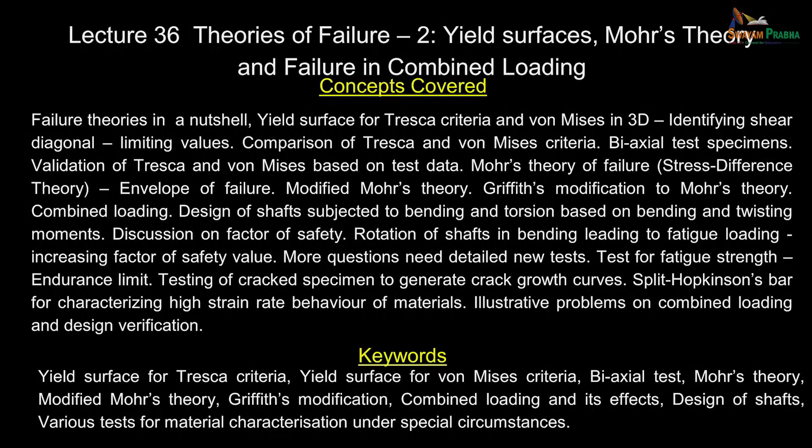Let us continue our discussion with theories of failure. You should recognize that these theories basically developed from a simple tension test. Later, people conducted experiments on geometries where they could change both sigma 1 and sigma 2, then verified it satisfies even in a biaxial situation.

As far as brittle materials are concerned, we have looked at the maximum principal stress theory. Once you go to brittle material, the ultimate tensile strength becomes important. There is nothing like yield strength - the material does not give you any warning, it simply fractures. We will not try to apply maximum principal stress theory to a ductile material.

One of the very famous theories, developed very early, was the Tresca yield criteria. The way you will have to appreciate this theory is that we are monitoring what happens to the shear stress.

It is written as sigma max minus sigma min divided by 2. When this reaches a critical value in a tension test, you go only up to sigma ys because you are pulling the specimen, and you want to see when yielding has taken place. You use that information and limit the shear stress at that stage to be the permissible one.

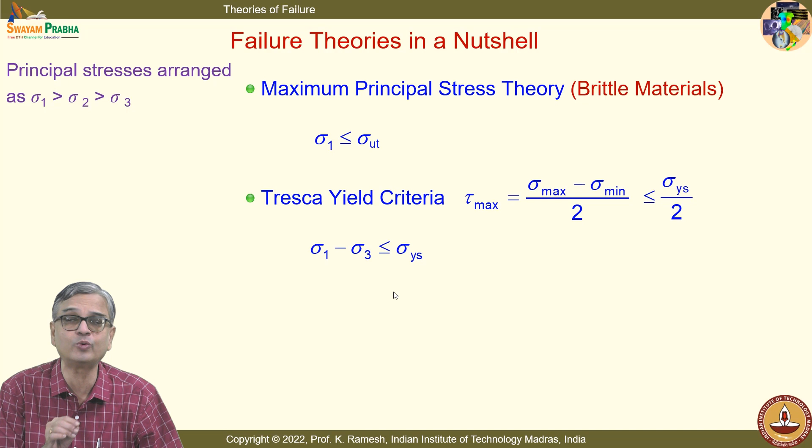So rather than sigma max minus sigma min, if you write it as sigma 1 minus sigma 3, even when both principal stresses are positive and both principal stresses are negative, when sigma 3 is 0, you will never make a mistake in the calculation.

We have also seen the von Mises yield criteria, which reduces to sigma 1 minus sigma 2 whole square plus sigma 2 minus sigma 3 whole square plus sigma 3 minus sigma 1 whole square, less than or equal to 2 sigma ys square.

I have also said that von Mises yield criteria comes basically from distortional energy theory. Later, the octahedral shear stress was monitored by Nadai, and whatever results you get from octahedral shear reaching a maximum and distortional energy reaching a maximum, the functional form of the equation for calculation reduces to this basic equation. This is a verification that the yield criteria has more justification, because you have approached the problem from two different directions, and both give identical results.

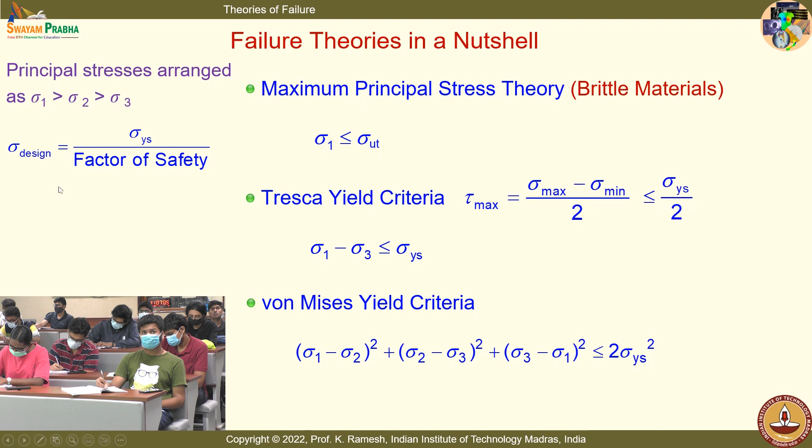Finally, when you do the design, nobody even goes anywhere near this yield strength. You have what is known as factor of safety, so you have a design strength, and all of these equations will change.

Sigma 1 should be less than equal to design strength, sigma 1 minus sigma 3 should be less than equal to design strength, and sigma 1 minus sigma 2 whole square final expression is less than 2 times design strength square. One of the most challenging aspects in design is how to estimate this factor of safety.

There are multiple considerations that go into it. We will discuss some of these aspects in class today. Other aspects, when you do the machine elements course, design of machine elements course, you will have more comprehensive development on how to decide factor of safety.

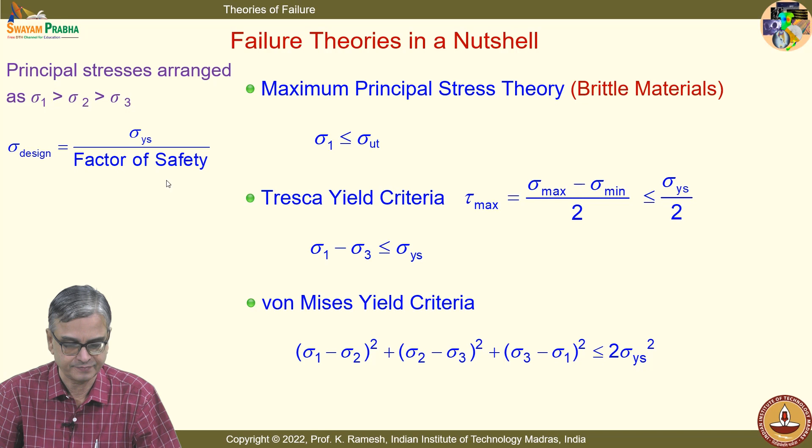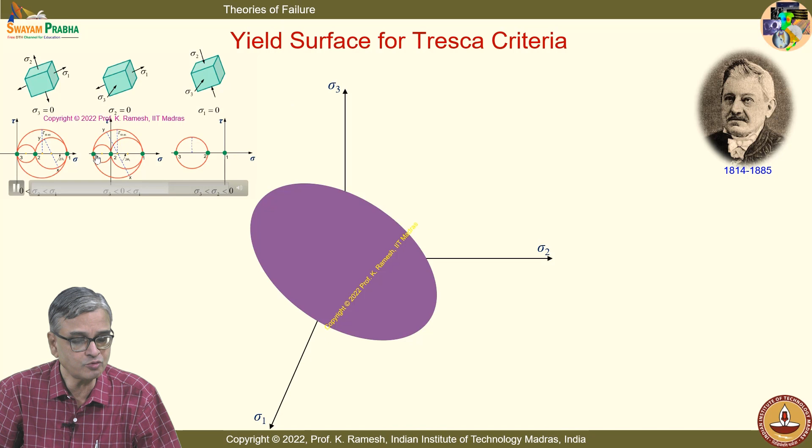You should recognize that this was one of the earliest criteria developed, in 1864. I have also been cautioning - when I have this, can I call this maximum shear stress? You have to look at sigma 1 minus sigma 3; only that gives the maximum shear stress. This becomes particularly important when both principal stresses are positive or negative, like what you have here.

You normally ignore zero - don't ignore zero. Zero is very important, and that is a contribution by Indian mathematicians. With all your environment now, you want to have zero emissions. So zero is very, very important.

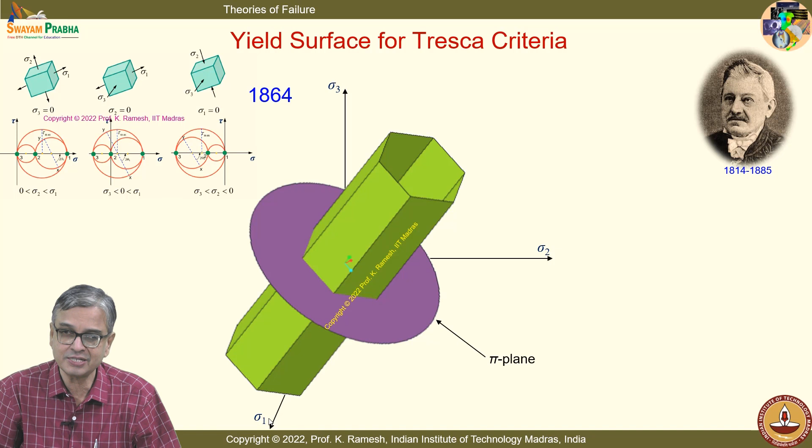One better way of understanding and implementing Tresca criteria is to use it as sigma 1 minus sigma 3. We have also seen that you can have what is known as a pi plane, which, referred in the principal stress reference sigma 1, sigma 2 and sigma 3, takes the form of a hexagon.

If you want to draw this, you can appreciate that I do a simple tension test and find out this point, because it goes to sigma ys. I can also keep the specimen horizontal and apply the load to get this point. I can also have a provision where I do a biaxial test, applying equal values of sigma 1 and sigma 2. Even in that case, because sigma 3 is 0, from the strength of materials you again get sigma ys divided by 2 as the maximum shear stress, so I can get this point.

So you can imagine how the first quadrant is obtained as a limit from our simple understanding of the tension test. The tension test also says something about the magnitude of the shear stress. When sigma y reaches yield in the tension test, from your Mohr circle you can find out what is the maximum shear stress. Once you have a pure shear stress state, you can always look at it as a combination of tension and compression. We have seen this repeatedly, using it to establish the interrelationship between Young's modulus and shear modulus, and when we wanted to paste a strain gauge on a shaft to determine torsion, since a strain gauge can measure only axial strain.

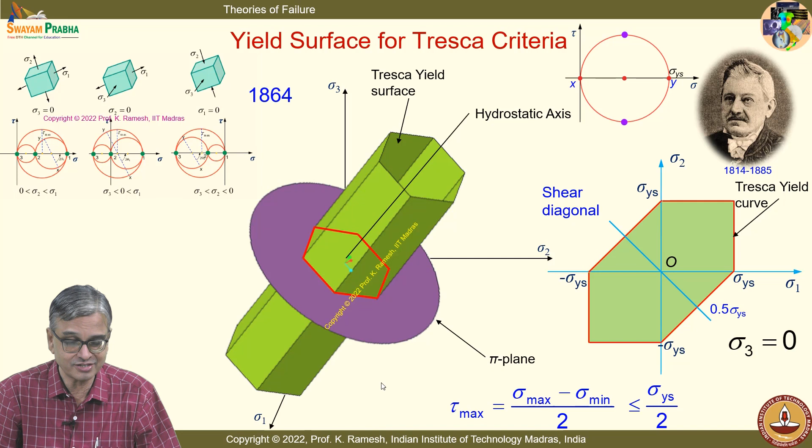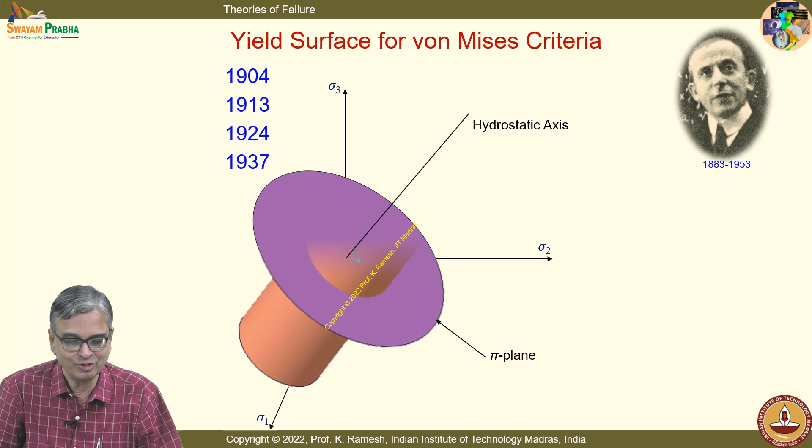The moment you get into von Mises, there are multiple contributors. It started in 1904 by Huber, 1913 by von Mises, 1924 with a better explanation from Hencky, and then in 1937 an altogether different approach by Arpad Nadai, who concentrated on what happens to the octahedral shear stress. So there are multiple contributors, and historians always go back to find even a trace of related knowledge to give credit. You'll be surprised that Maxwell also thought about a theory similar to this, and Maxwell is mostly understood in electrical sciences, because in those days all branches of physics came under one umbrella.

You find this von Mises yield surface is a cylinder, and the curve is a circle in the sigma 1, sigma 2, sigma 3 plane. But if you put it in the sigma 1, sigma 2 reference axes, it gets elongated and takes the shape of an ellipse. So if your stress state is within this ellipse, no yielding is possible. If it is on the boundary or exceeds it, then yielding is definite in a given material.

All of these have been conjectured based on a simple tension test, and you should never lose track of this. You can justify that these theories are useful only when you conduct complicated experiments, plot the experimental data, and verify whether it matches. We will also see that.

Now the next question is, I have shown von Mises independently, and I have also shown Tresca independently. You've seen the shapes: it is a hexagonal cylinder in the case of Tresca, and a circular cylinder in the case of von Mises. How do these two compare? That is also very interesting to see.

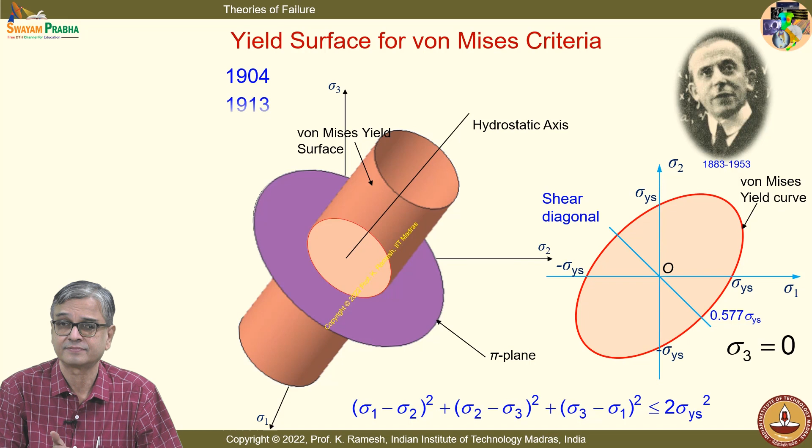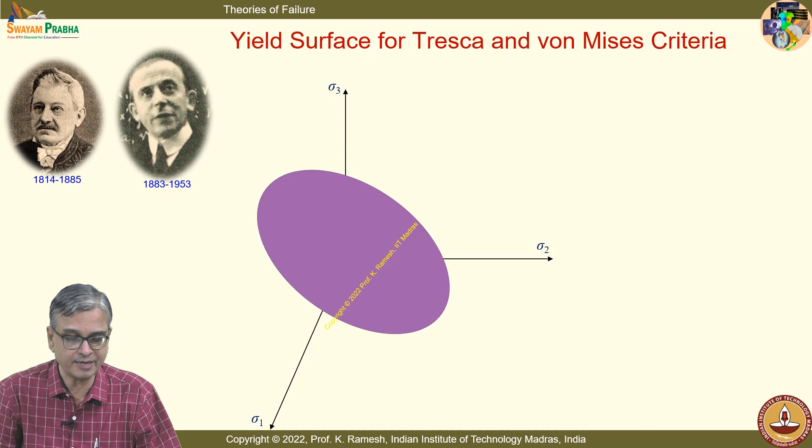Suppose I plot these two theories in one reference, you get a very interesting geometrical appearance: the von Mises cylinder just encloses the Tresca yield surface. It is slightly different. From a computational point of view, Tresca was very easy to do. Imagine if you have a slide rule, how will you compute sigma 1 minus sigma 2 squared and so on, as in von Mises? You can't easily, but with Tresca you can definitely find out the difference. So you should give credit, it was one of the earliest theories.

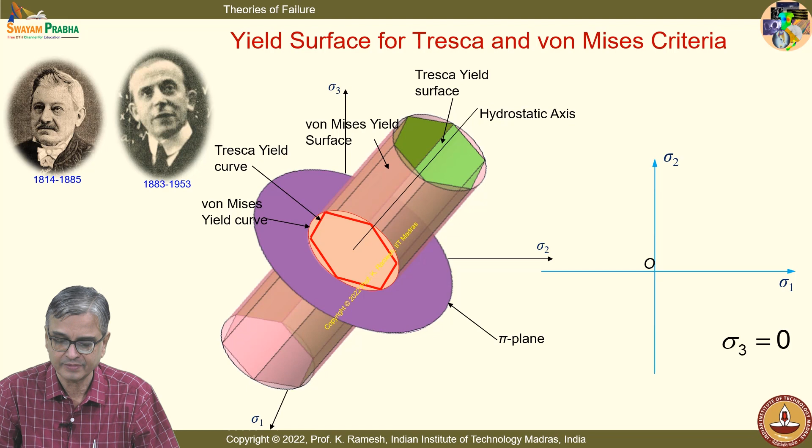So I have this as a circle enclosing the hexagon, and when you see it in the sigma 1, sigma 2 reference, when sigma 3 is 0, I have this elongated hexagon. This is enclosed by the von Mises ellipse.

So the idea is, in a real life situation when you have complicated loading acting on the system, if you are able to find the principal stresses, and their combination lies within this elongated hexagon, it is predicted by Tresca that you will not reach yield. Von Mises is slightly relaxing this, so it allows a small increase, and within that, if your point lies, you have not reached yield condition, meaning you are safe.

So this is looking at the extremum value. When you go to design, you never go near this unless you want crash protection, where you want the occupants in the car to be protected. After the accident, you want your crash bar to go out of shape while you remain in good shape, so it should absorb maximum energy. There you allow it to fail by yielding. In none of the practical applications do you ever go anywhere near this.

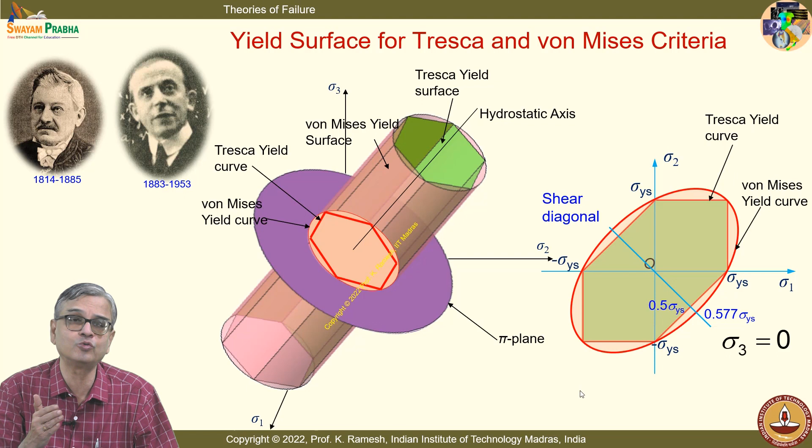Now we will also see the shear diagonal in one diagram. You will see the von Mises theory gives this value as 0.577 sigma ys, whereas Tresca gives this as 0.5 sigma ys. So even if you do Tresca analysis, you are conservative, your failure will not happen.

These days, with optimization where we work on space technology, weight reduction is very important. People want to do the analysis to the extent they just have material to do the intended task. That means your mathematical modeling should be very close to what is anticipated in the actual condition, and you want to optimize, you want a light helicopter, isn't it? Initially they make a helicopter to fly, then they try to find out where they can reduce the weight.

Same is the situation in the case of landing gears. We have seen photoelastic coating employed to reduce weight. So when learning stress analysis, it is not only the maximum stresses that are of concern, even the minimum stresses you want to keep at a reasonable level so that the weight of the structure comes down. So it depends on the requirement. Remember this: failure theory is a substitute for good test data. If I have good test data, I would rely on that.

Not only that, in the early development of jet aircrafts, I said that you had big windows, and even Queen Elizabeth traveled in that, and the DGCA of US said that these big windows are dangerous. There have been explosive failures of the Comet aircraft. It happened even when it was taking off from Calcutta. When they analyzed it, they found a crack generated from the window, and the plane burst like a bomb in midair.

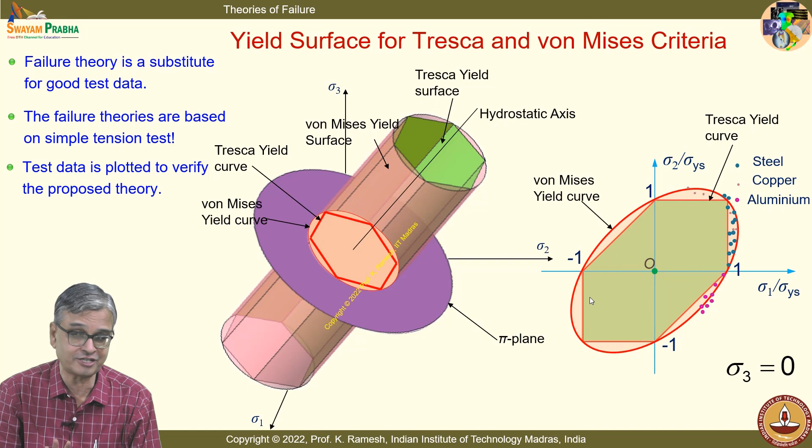You have the greatest advantage that you have proposed these theories based on a simple tension test, and these are verified. None of you have told me if you apply internal pressure, what happens?

It is a true biaxial stress state when the ends are closed. When the ends are closed, I have PR by T and PR by 2T. Suppose I, in addition, apply axial tension, I have control on modifying sigma 1 and sigma 2. When I want to perform the test, I want to do it for a variety of combinations. Only when I do it for a variety of combinations can I pat my back and say that I have exhaustively analyzed, otherwise not.

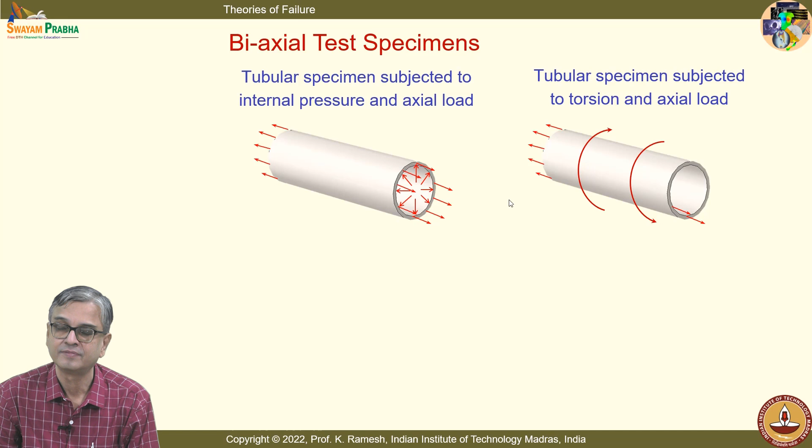You also have a tubular specimen subjected to torsion and axial load. And you also have a possibility of using a simple elliptical sheet subjected to internal pressure.

And the best way to do is a cruciform specimen. I have complete control on what I want to do with sigma 1, what I want to do with sigma 2. Your test section is the inner core of the specimen, and the design of this fillet are all design issues, a very subtle point, because the specimen should not fail either at the grips or at the fillets. It should fail only in the interior.

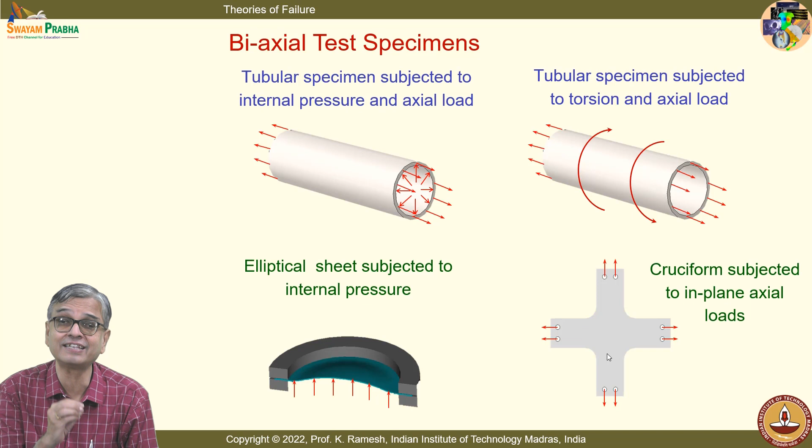So people have also designed new specimens so that you push it and find out whether these theories are valid. The focus is that. So you can feel safe, scientists have not had a dream and then said you follow this theory. It is all tested, verified, reconfirmed by several bright minds over the years.

So you have test data from this. I just want to give you that if you want to get what happens in the first quadrant as well as the fourth quadrant, you will have to get some of these tests done, very carefully done, very expensive.

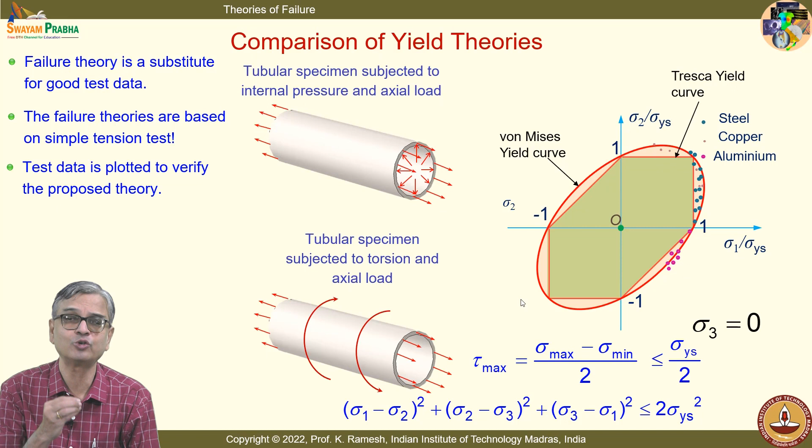Then you populate and satisfy yourself that these theories are good enough approximation for you to carry on with routine design. For any special purposes, people do have final test rigs, very complicated, whether it is an aircraft, a car, or even your train, because now India is developing Vande Bharat, it was known as Train 18. They have to have test rigs to test the complete bogie for several field conditions.

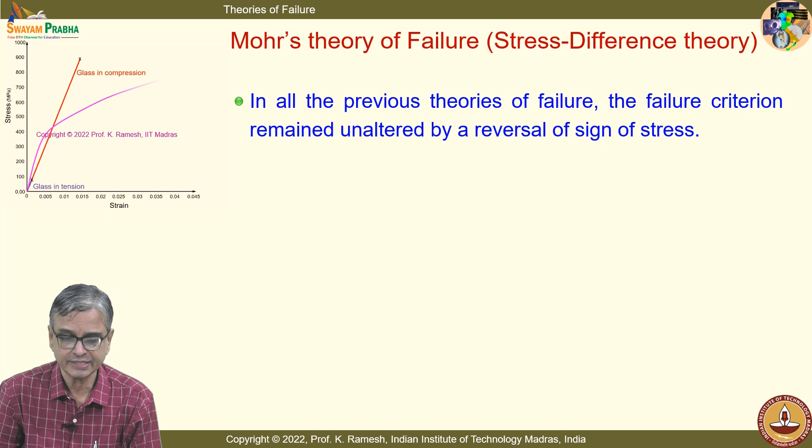We have always been observing when you have a brittle material, it can have a different compressive strength and a different tension strength, and the difference is very large. So all the previous theories we have looked at, the failure criterion remained unaltered by a reversal of sign of stress, because whether it is tension or compression, the yield strength for most ductile materials are very similar, with no major difference. For brittle material, the yield stress is considerably different in tension and compression.

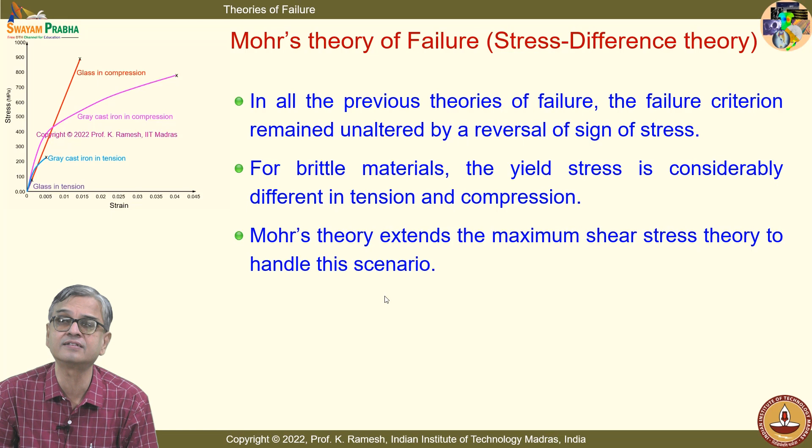So the Mohr's theory extends the maximum shear stress theory to handle this scenario. It was developed by Coulomb in 1773 and has been generalized by Mohr in the 19th century, so it is called Mohr-Coulomb theory as well. You call it Mohr's theory, but if you dig into the history, people say Mohr-Coulomb theory. And if you look at it, after the development of fracture mechanics, Griffith, a very famous name in fracture mechanics, has also contributed to this theory of failure.

All these failure theories have a history. They weren't developed in one day, but proposed, verified, modified, and generalized by several scientists over time. When we looked at the maximum principal stress theory, we credited it to Rankine, whose period is between 1820 to 1872, whereas Mohr's theory of failure traces back to Coulomb in 1773. That means what Coulomb said was not very clear; it was generalized by Mohr, which is why we call it Mohr's theory, and that happened probably later than Rankine. Otherwise, logically, you should have credited the maximum principal stress theory as the theory for brittle material. People were not comfortable with this, and that thinking was there even before Rankine. That is what you learn from historical records.

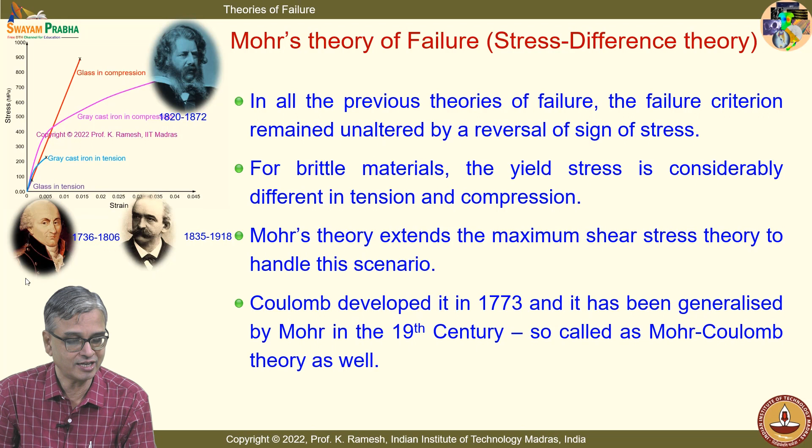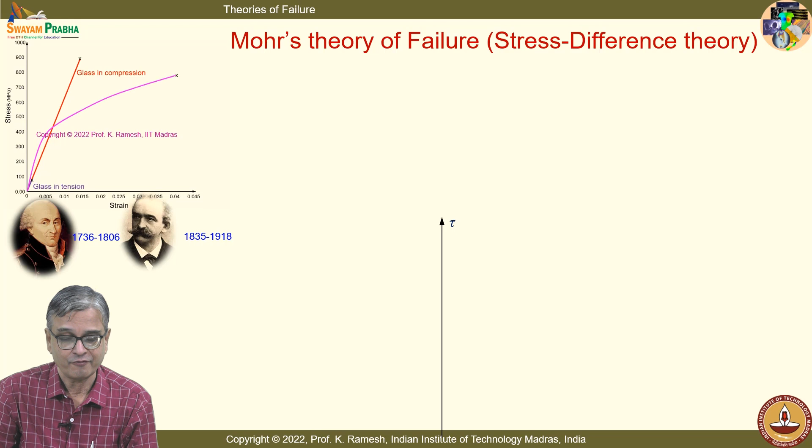So how do I plot it? If I want to plot it, I must bring in the difference in magnitudes. What is recommended is you do a test in simple tension and find out the Mohr circle. You do the test on the brittle material with a pure shear stress state, find the Mohr circle, and then find another test with maximum compression. You only compress the material and draw the Mohr circle, and the envelope of all these Mohr circles tells you what failure can happen in a brittle material.

For all the previous theories also, you can draw the Mohr circle and find this envelope—those envelopes are simple ones. If I want to plot it like what I've done in the case of Tresca and von Mises in sigma 1, sigma 2 space, I have to draw it on screen, so I have to modulate my sizes.

If I have a simple maximum normal stress theory, it would look like a square: in the first quadrant you have this, and the third quadrant, which talks about compressive stress, will also be of the same size. But a brittle material does not have the same compressive strength as tensile strength—compressive strength is very, very high, 13 times higher. So if I extend this, I should have plotted like this, but this was not the theory accepted by people.

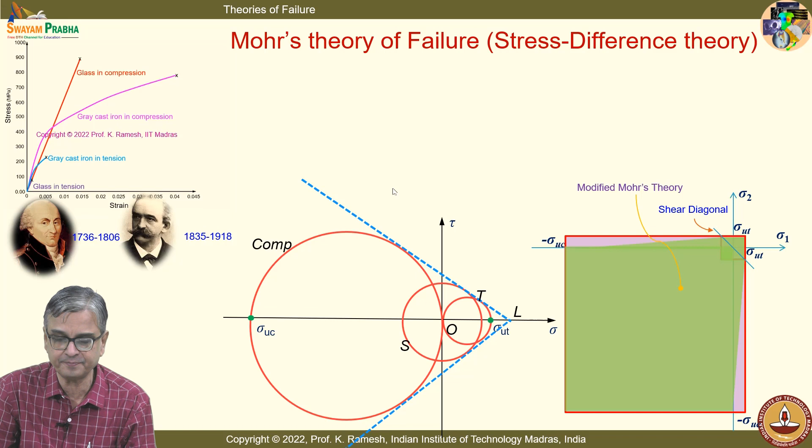Griffith modified it further with the understanding of fracture mechanics. He said you do not stop at sigma ut, but at 3 sigma ut, and this becomes a curve, not a straight line. The blue and green areas show Griffith's modification—I've put these colors with some transparency to see the layers, so the blue does not merge with the green but shows the modification by Griffith. As long as your stress state lies within this zone, a brittle material will be safe. Brittle material researchers worked mainly with rock, since rock is a brittle material.

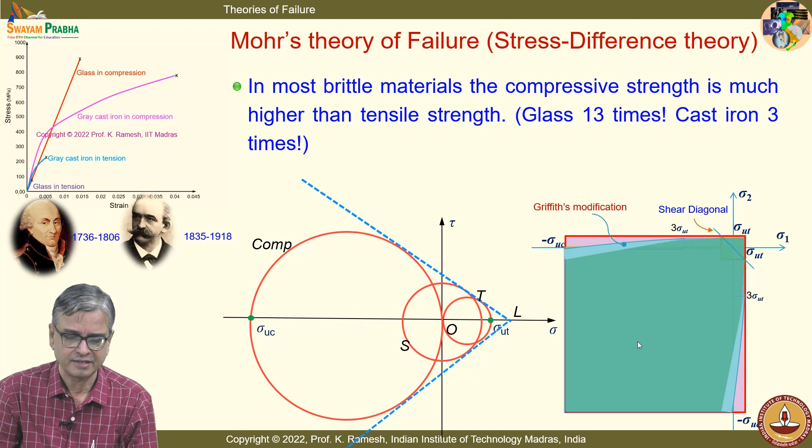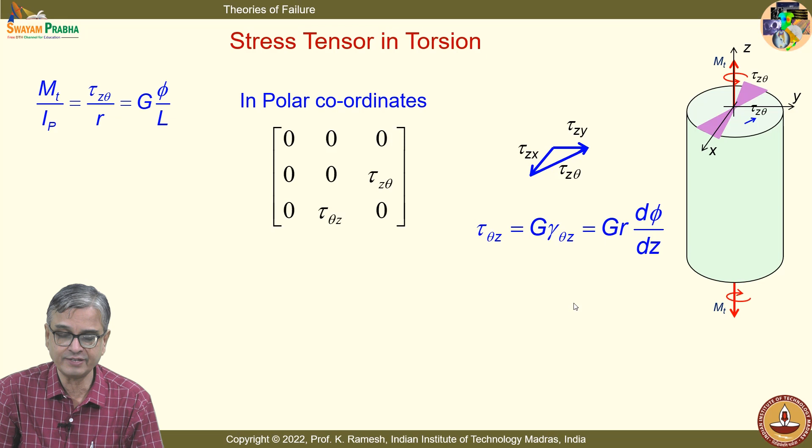We have also seen stresses in torsion. The shear stress varies tangentially and varies as a triangle. I can write it in polar coordinates as tau z theta, tau theta z, or in xy coordinates where I call the axis z. So I have tau z theta resolved into tau zy and tau zx, giving the stress tensor in Cartesian coordinates like this.

Let us see, even in a simple Atta-Chakki problem, what are the forces that come on the shaft. I have shown a generic shaft here, not the one actually used in Atta-Chakki, since that one is hollow and tapered.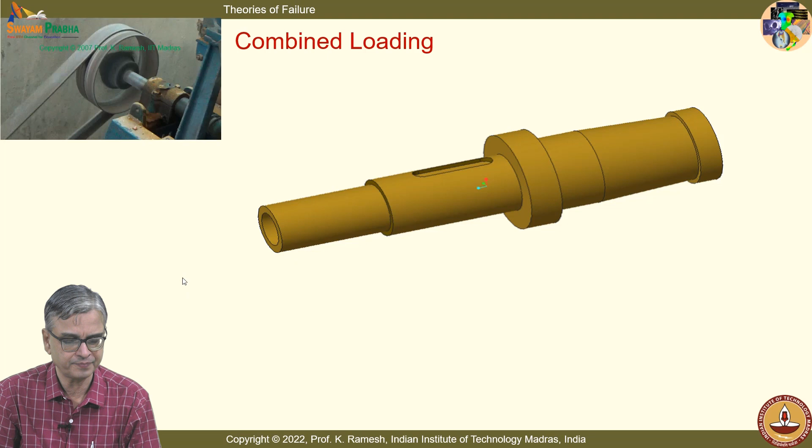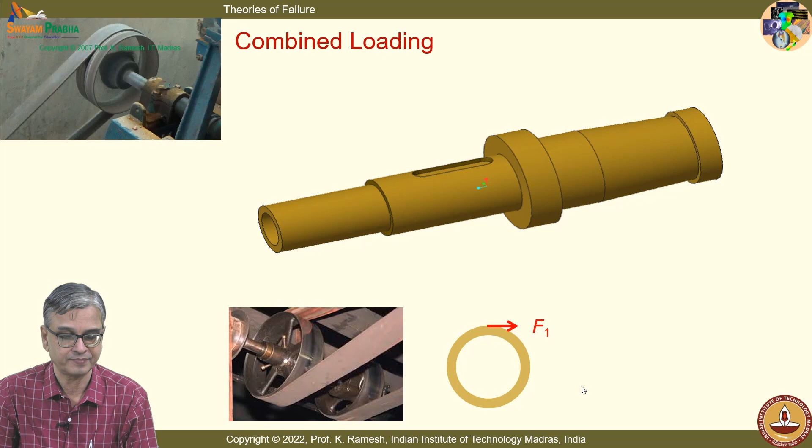When I have a belt drive, recollect what you learnt in rigid body mechanics. You have tensions T1 and T2, and this essentially introduces only a twisting moment on the shaft.

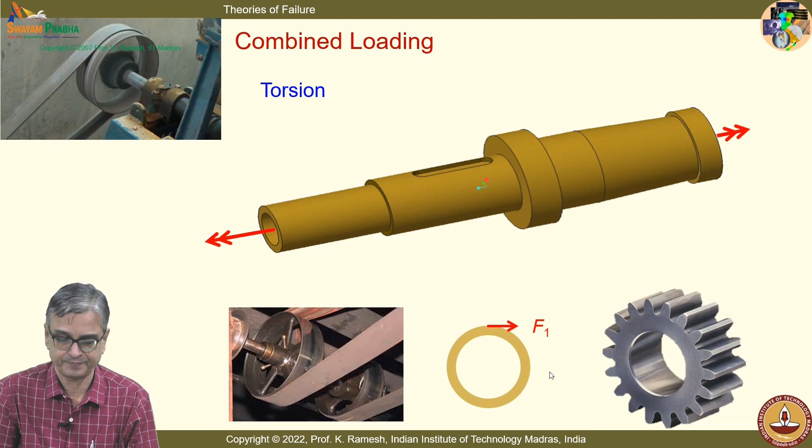Suppose I have a spur gear mounted on the shaft. With a spur gear, you have a pressure angle, and the load transfers along this angle. So I get a horizontal component causing twisting and a vertical component that adds up to bending of the shaft. If I look at the Atta-Chekki, the bearing will also give a reaction, so the shaft is subjected to bending loads.

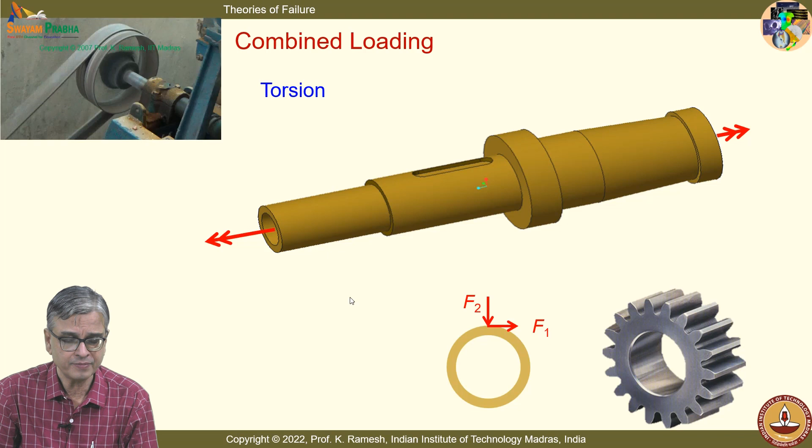Torsion and bending loads are very common in a shaft, but we have studied them separately. That is how we develop the subject.

Suppose instead of a spur gear, I have a helical gear on the shaft, needed to take out power and operate something else. This helical gear will also have an axial component. So I have torsion, bending, or tension and compression. In real life, even a simple down-to-earth problem may have a combination of these loads. You never have one unique loading, but while learning the subject, you learn them independently.

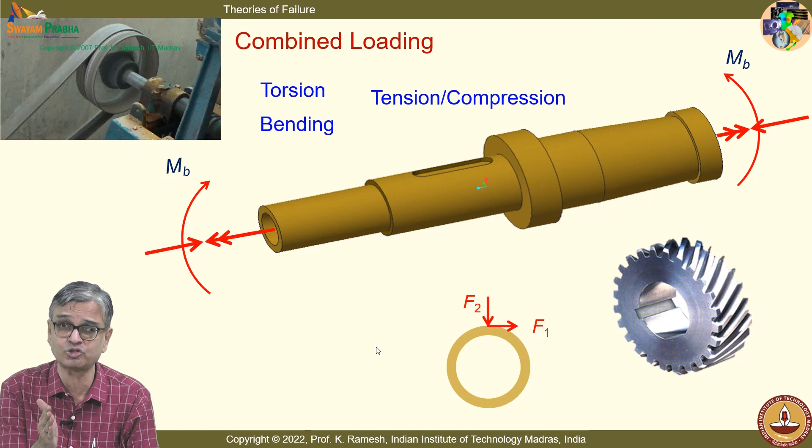We have said we are working in linear elasticity. So in linearized elasticity, I can use the principle of superposition, individually compute the stresses and add them up. We have actually solved one problem, but there is also something very interesting here.

Let me see how many of you have looked at it. I have a shaft rotating, and I just said the shaft has a twisting moment as well as a bending load. What you learnt in the course, we solved one problem where it is prudent to understand the axis as Z and then add the stresses comfortably to get the combined loading.

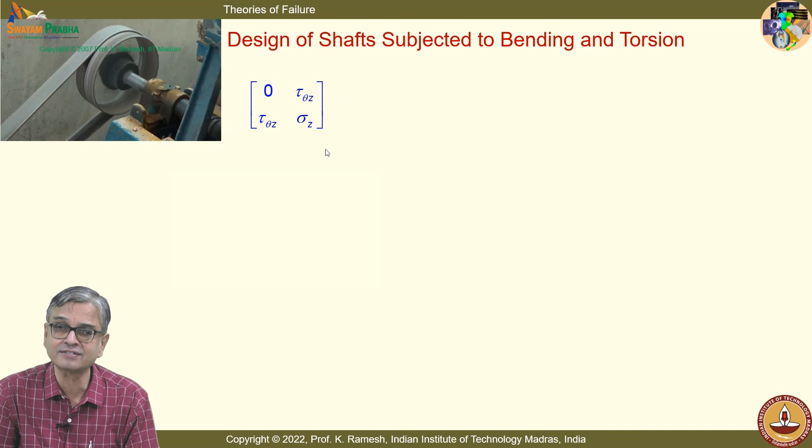So stress in case of bending is given in terms of bending moment: sigma equals 32 MB by pi d cube. Stress in case of torsion is tau equals 16 MT by pi d cube. And we have combined them.

You remember we solved the femur problem where I showed how to superimpose, changing the reference axis in a convenient fashion. So if I have a shaft transmitting bending and torsion, any member transmitting bending and torsion, I can get the stress tensor in this form, with magnitudes from the bending moment and twisting moment using these expressions.

Now, in Atta-Chekki, this shaft is also rotating. Do you see anything interesting in this situation? When the shaft is rotating, it is subjected to bending. Can you visualize something more interesting happening in a shaft subjected to bending?

Long time back, we took the example of a gem clip, and said when I pull it out, I cannot fail it. What did I do? When I bend it back and forth, I get it beautifully broken. I've given you the clue - can you visualize what is happening because the shaft is rotating?

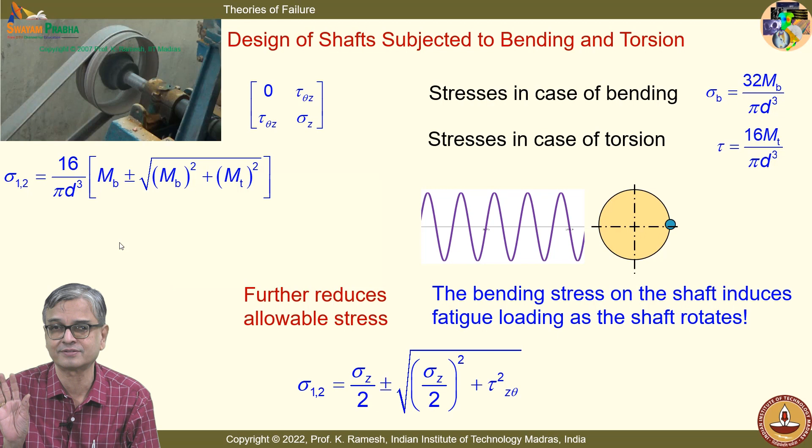But people in the field will use this, they do not have to know the theory, they have to know what formula to use. But as engineers, you should know the background.

Now let me go back to your femur. See, femur is basically hollow, but I want to illustrate there is one other concept. I want to ask a question. Suppose I have this as a solid one and then I find out my principal stresses using this. I have some numbers.

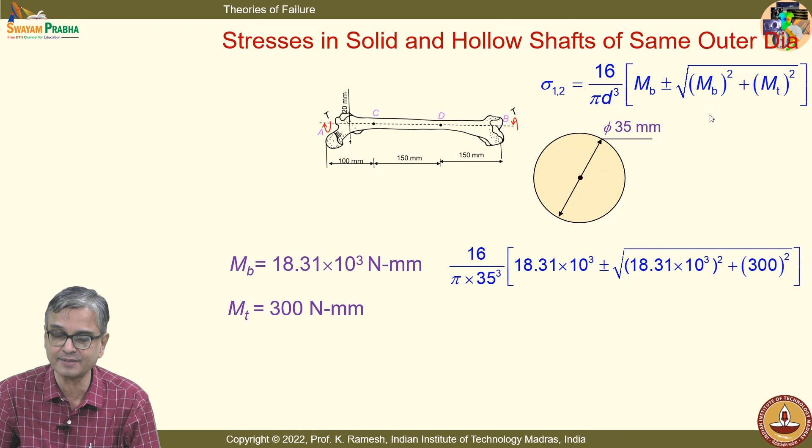When I substitute this, I get sigma 1 as 4.35 MPa, I get sigma 2 as minus 2.92 into 10 to the minus 4, it's almost close to 0.

Now let me ask, I want to have a look at the specimen which has outer diameter 35 but hollow. What have we learnt in the course? We have learnt in the course, if you make the shaft hollow or beam hollow, you can increase the strength. Under what circumstances? Same material or same cross sectional area.

Suppose I ask a question: when I have the outer diameter 35, I want my hollow specimen to also have outer diameter 35. If I put the question differently, I have seen sigma 1 as 4.35 MPa. If I calculate the stresses, will they be more in a hollow shaft or less than in a solid shaft? Louder, you have to recognize that, so you understand the concept correctly.

See, femur is hollow, fine. And when I have the femur, I can simply use this expression. I have also given that expression. If I put the ratio of inner diameter to outer diameter here, the expression gets modified with a factor, 1 minus inner diameter divided by outer diameter whole power 4. I get the sigma 1 value as 9.45 MPa. So understand the concept: hollow shafts are very strong.

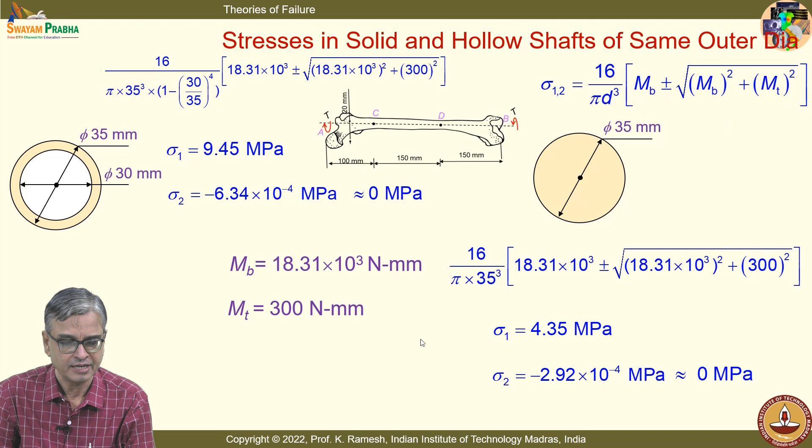See, it's much more complicated than a tension test. I need to have hundreds of specimens tested with different surface quality and so on. That's how people have tested.

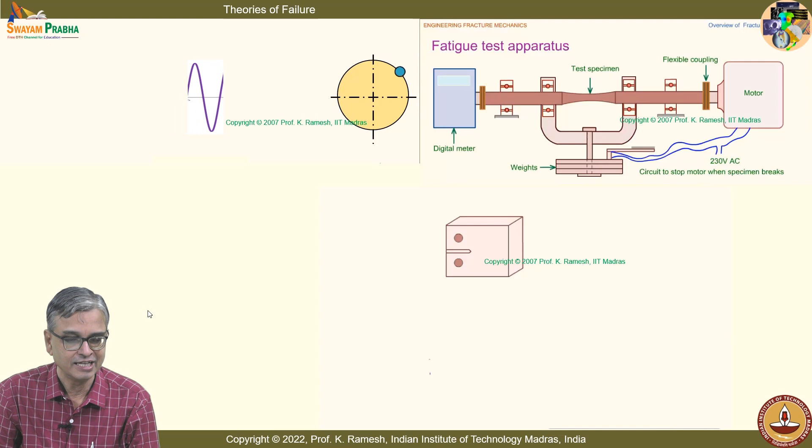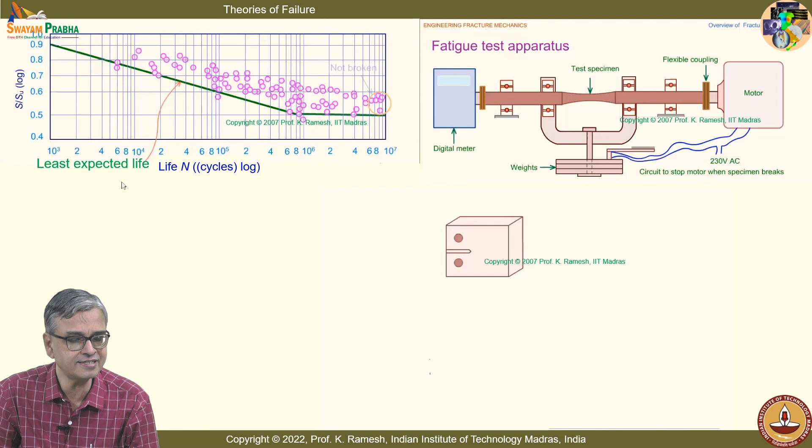And when I plot this, I have this, it goes as a fatigue loading. As the shaft rotates, causing fatigue loading. Understand this. So now I plot this for a specimen. I will generate so many points like this from my tests, and this shows the least expected life when I apply the repeated loading. And people also had, if I exceed 10 power 6 cycles, they call this infinite life, and they have something known as endurance limit.

In later courses you will study this. If I have any repeated loading, I have to determine my factor of safety much below the yield strength. I will have a factor of safety of at least 2 when applying for fatigue loading, and it will be greater than 2 if I have to bring in other aspects.

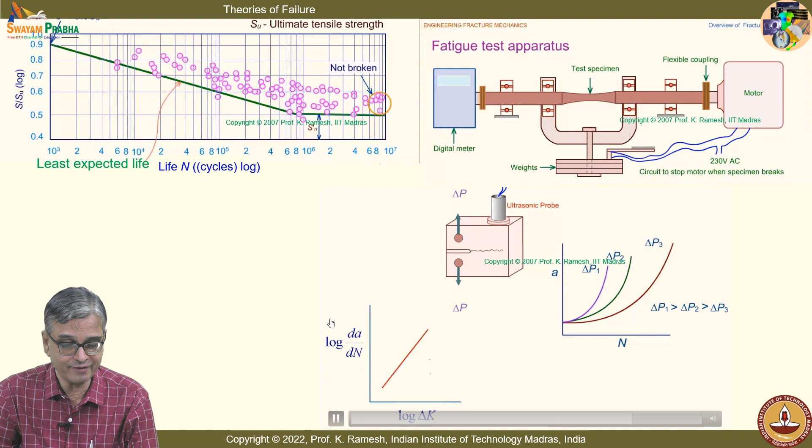Suppose I ask a question: all failures, how do they generate? You have a crack that grows on the surface and fractures. Can I monitor how the crack grows? You can't answer unless you develop another test, where I have a specimen with a crack and an ultrasonic probe to find out how the crack grows, and then I plot crack growth curves. From these curves, I post-process, and you get dA by dN, log dA by dN versus log delta K, which becomes a straight line. This is known as a Paris law.

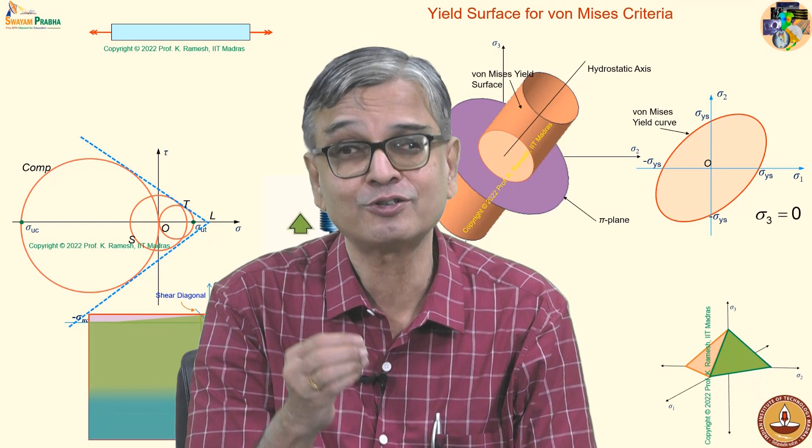Research labs spend enormous amounts of money testing materials, and no country will give you this. For defense applications, you have to develop your own material and your own testing. In fact, for LCA development, our NAL laboratory was testing such specimens round the clock for several years. So if you ask more questions, remember, you have to spend more, if the questions don't get answered simply from your tension test. But people have solved this.

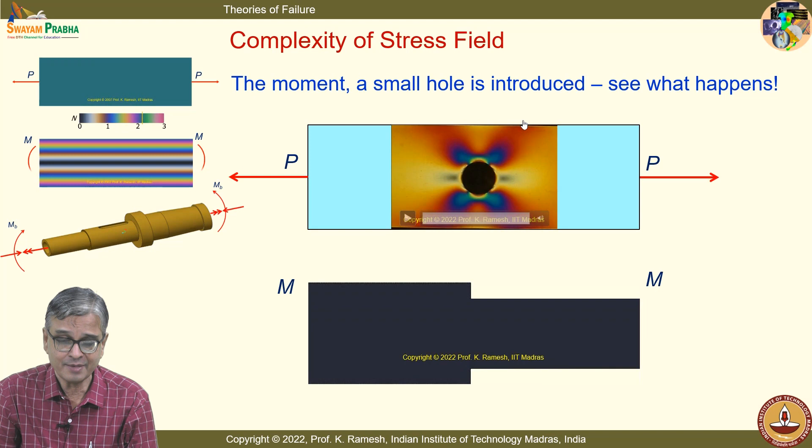Now let us look at what happens. The solution I am going to show is for an imaginary infinite plate with a small hole, whereas this is a finite plate with a comparable hole. Just an illustration: for an infinite plate with a small hole, if you plot sigma theta theta on the hole boundary, it has a very interesting shape. I want you to write this: sigma theta theta equals sigma xx times 1 minus 2 cos 2 theta. This is very, very important information.

What I get is, where the density of fringes is very high, I get this as 3 times the stress. Mind you, this is for an infinite plate with a small hole. For a finite plate, it can be much higher than 3, it can even be 9 times. So you will always have to do an experimental analysis or a numerical analysis to get this stress concentration factor for a finite plate.

There is also something very interesting. I have shown a nice graph, and I have also shown the sign change. How many of you were taken by surprise? Don't you think you should be? Because I take a specimen and only pull it. As long as I don't have a hole, everywhere I have only tension. The moment I put a hole, what happens? Stress magnitudes become larger, and the stress field becomes complex.

Suppose somebody is supplying you material, because one of the consequences of COVID was supply chain was affected. You are sourcing it from a particular source, then you change the source, and the material property will not be consistent. Even in your hostel, if they are serving you vada with urud dal, he has to source it from the same place for you to get the same taste. Some good food chains are very particular about what ingredients and from where they source them.

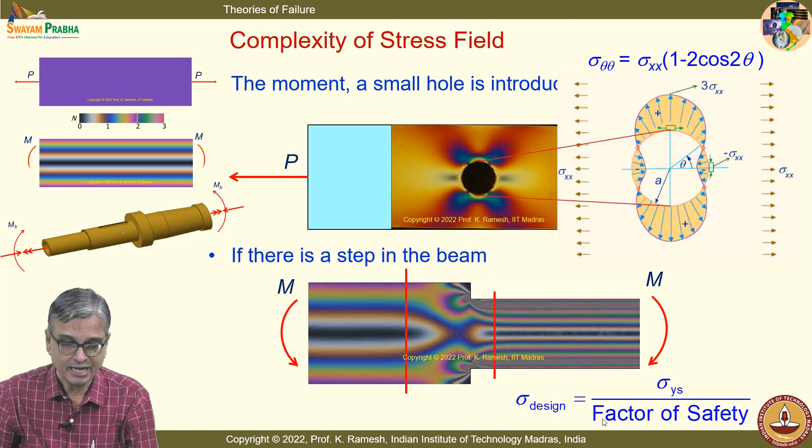Same thing applies for your automobile design also. If they are making components, they will source the raw material from the same source and test it every day. It is not like once in a blue moon they test it. Every raw material, before it is converted into the actual product, they verify the properties are the same. Only then do they pay the supplier. So this is very important.

And you know, in modern days you have the issue of explosions. If you ask more questions, you have to do more tests, there is no other way. Now you have the Bogibeel bridge in the Brahmaputra, which connects the northeast, 4.94 kilometers, and this is designed to withstand explosion. You also have the Chenab railroad bridge, recently completed in Jammu Kashmir. All this you have to design to withstand earthquakes and bomb blasts.

So you ask a question: I have a high strain rate, so I need a different test setup. I have a split Hopkinson's bar, where I have a gas gun which propels this striker bar, and the specimen is very small. This generates a very high rate of strain, and you have a high speed camera which records this, and the data is then processed.

So the material properties change significantly at high strain rates. Also at extreme conditions - if I want to work in cryogenics, it is becoming very important in space technology. And if you want to design a gas turbine, efficiency goes up if I work at high temperature. The tension test you have done is at room temperature, so you have to conduct tests at high or low temperature, generate test data, and material scientists play a very important role. All that goes into your design.

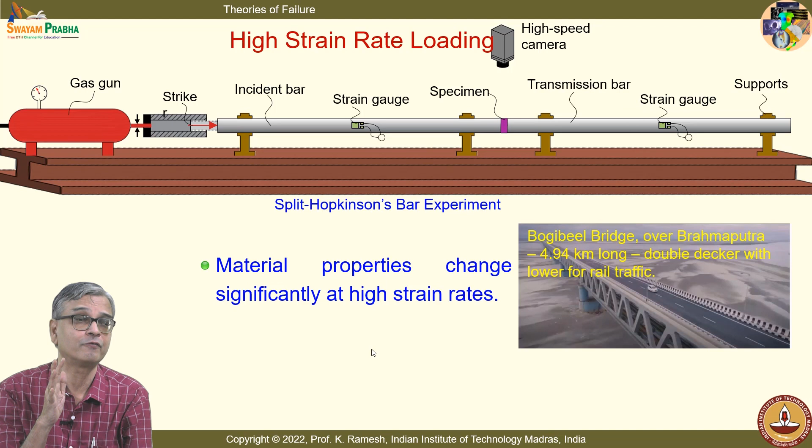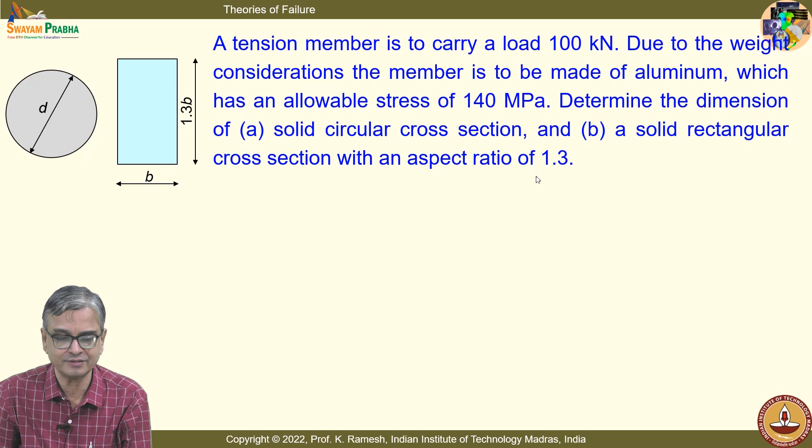We will also see two simple problems. The first problem is very simple, to remind you that if I have a simple tension member, the geometry of the cross section has no role to play. You have an allowable stress. Now, we are not going to work at yield strength - somebody has done the requirement analysis and decided the factor of safety. So for this material you use only 140 MPa, and you are also given the geometric shape of the rectangular cross section, with aspect ratio given as 1.3. It's a very simple problem.

I have always said that once you have a problem, learn how to write the stress tensor. It's a tension, so I have sigma y, with the value given as 140, and you have the simple criteria: allowable equals force divided by area. You have an expression for the area requirement, and when you translate into a circle or a rectangle, you can find out what should be the diameter of the circle or the distance b for a rectangular cross section. A very simple problem - the purpose is to illustrate that when I have axial tension or compression, geometry does not play a role.

Many practical problems are compressors - you have your pressure cooker, your Indane cylinder, your aircraft. All of these are pressure vessels, and a pressure vessel is one problem where you have a true biaxial state of stress. You have a thin cylinder approximation, and you have learned the ideas of how this gets stressed when I have a thin cylinder. So here the idea is how do you write the stress tensor and then find out the limiting values.

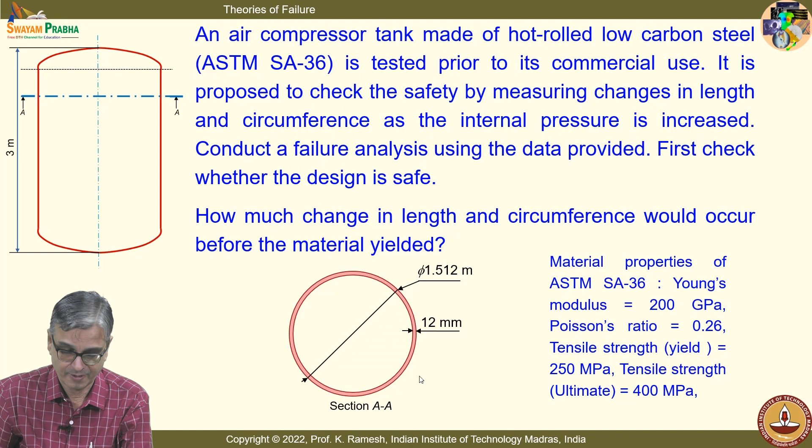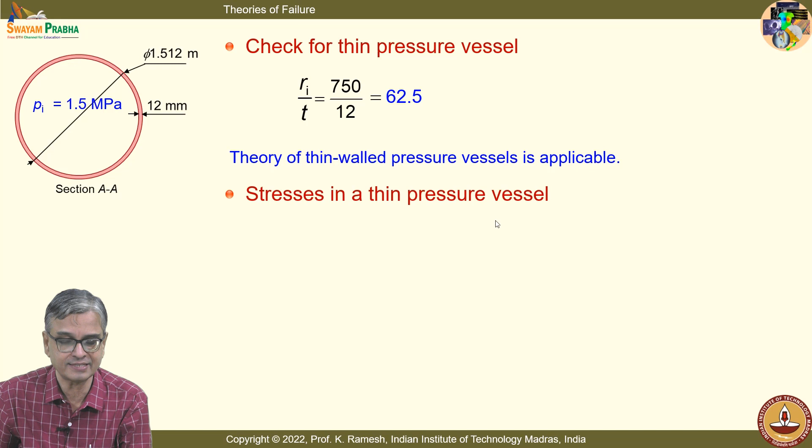First you have to check for a thin pressure vessel. It is obviously a thin pressure vessel - I have this greater than 10, it is about 62.5, so the thin pressure vessel assumption is applicable, and you know the stresses in a thin pressure vessel.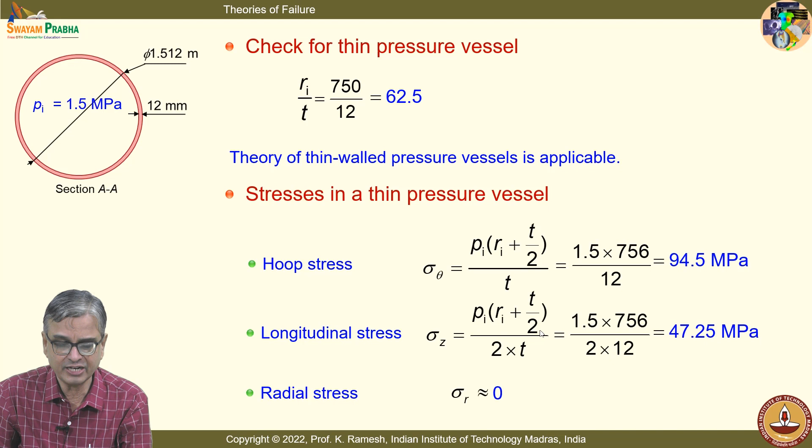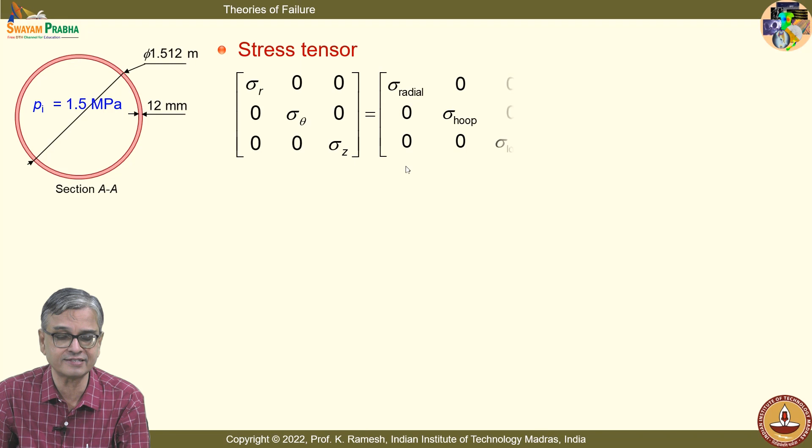I can find out, even without the calculation, you can say it is of this form because it is PR by T and PR by 2T, and we have sigma theta and sigma z, and your radial stress is pressure - we normally say that it is a very small number, so we take that as 0. You learn how to write the stress tensor, and when I have the stress tensor, fortunately all of them are diagonal.

Now from the design we want to look at the maximum, algebraically the least, as principal stresses. Can I have this as radial, hoop and the other one? This is the maximum, so this becomes sigma 1, and this becomes sigma 2, 3.

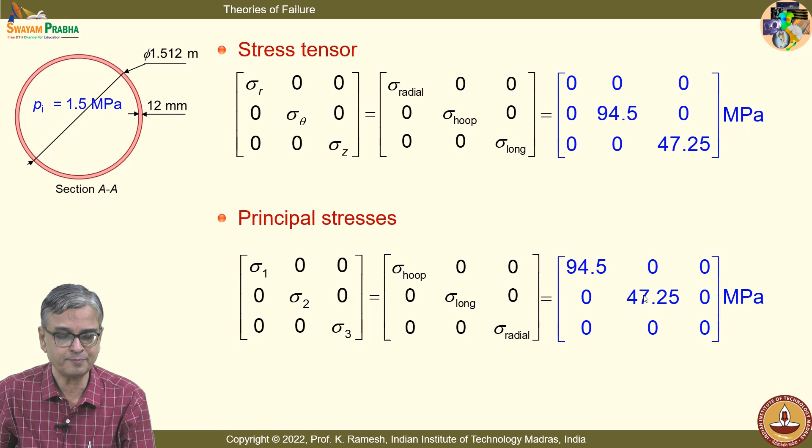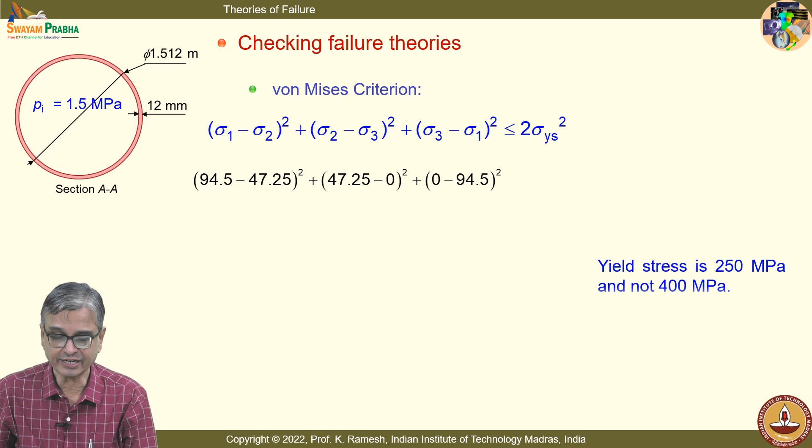Then you simply apply your theories. So I have the one - you write the von Mises form, substitute these numbers, and you are in a position to calculate this and check whether you should use 250 or 400. Either way it doesn't matter numberwise, but concept-wise, yield strength appropriately.

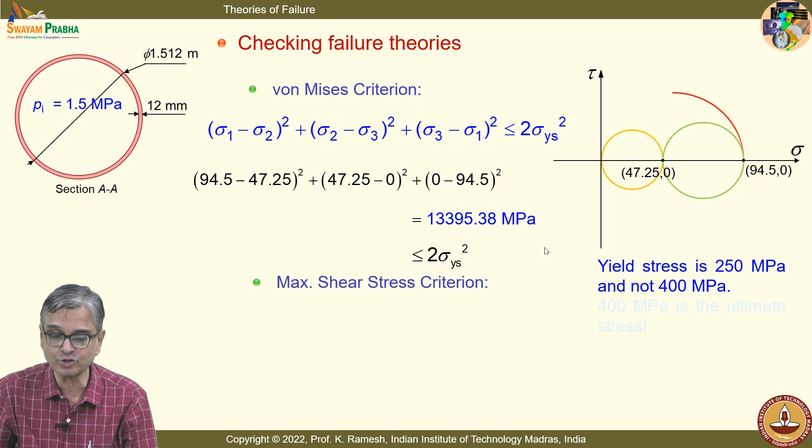The maximum shear stress criterion - recognize that if PR by T and PR by 2T, from the Mohr's circle, you will be tempted toward maximum shear stress. Please do not fall into that trap. You must recognize that from the circle, if you say it is sigma 1 minus sigma 3, when I do sigma 1 minus sigma 3, I get the correct expression, and you can find out the yield criteria - so materially it is safe.

In the field, the person will only see geometrical changes. So that is the next part - what are the strains before yielding? To make our life simple, we simply take the Tresca yield criteria. It's again an engineering decision - my calculations are very simple, and it is very close to the von Mises yield criteria. So I look at this.

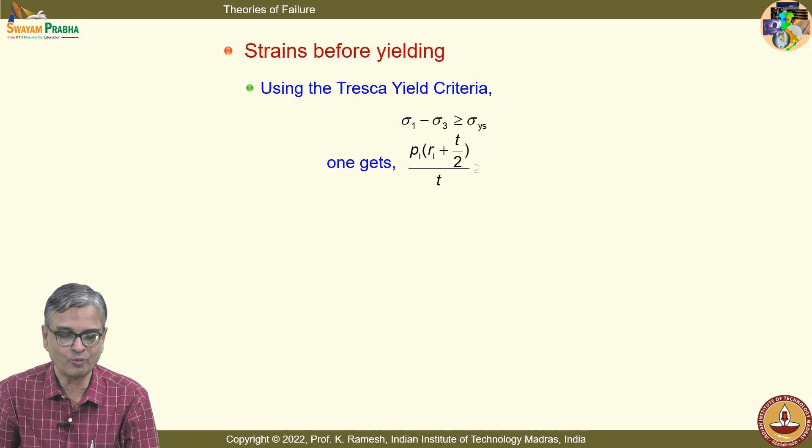So now I write the expression for strain - write the strain expression completely. Don't simply say sigma z by E; these are all common mistakes people make. You should recognize I have sigma theta and sigma r, and the Poisson ratio comes into the picture.

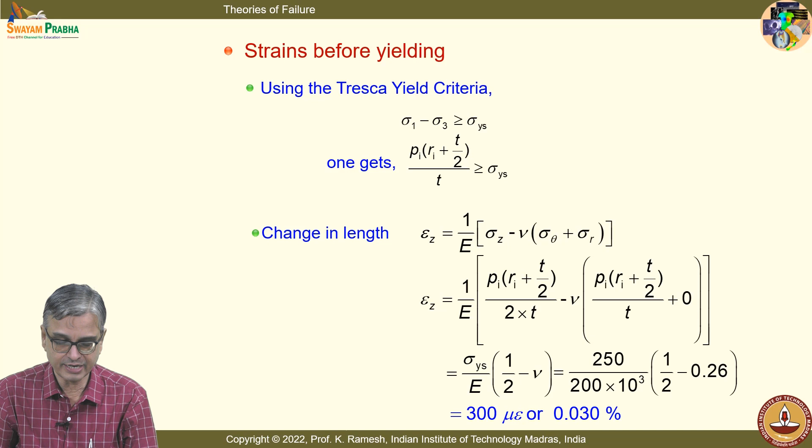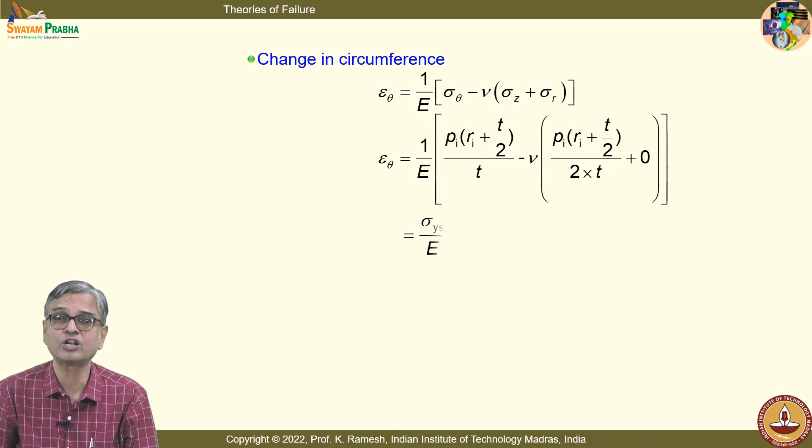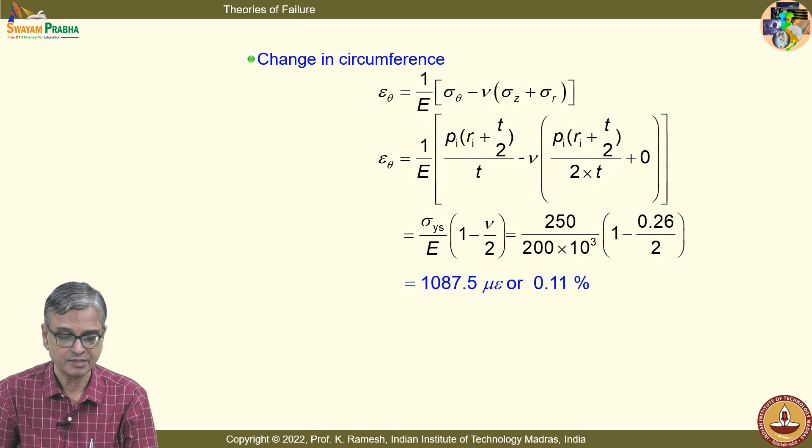Find out what is the strain in the z direction - you can easily compute this, and it is about 300 micro strain. You can also find out the circumferential change using the strain-stress relations completely. Every concept that we have developed or reviewed is the idea behind theories of failure - you get to know how to use the concepts. So I get this as 1087.5 micro strain.

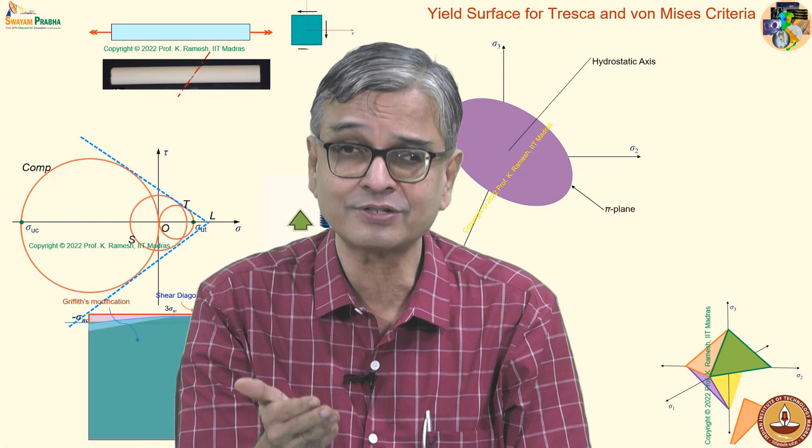In this class, we have looked threadbare at the nuances of theories of failure, and we have also had a bird's eye view of the complications you face in an actual design. Even a simple shaft, if it is rotating, has a surprise - fatigue loading. The moment you have fatigue loading, the allowable strength drastically reduces, at least by a factor of 2. When you have a stress concentration, it increases the stresses. You can also have a very complex stress magnitude, and surprise compression. So your factor of safety is not a simple idea - it is very important to understand how to choose an appropriate factor of safety.

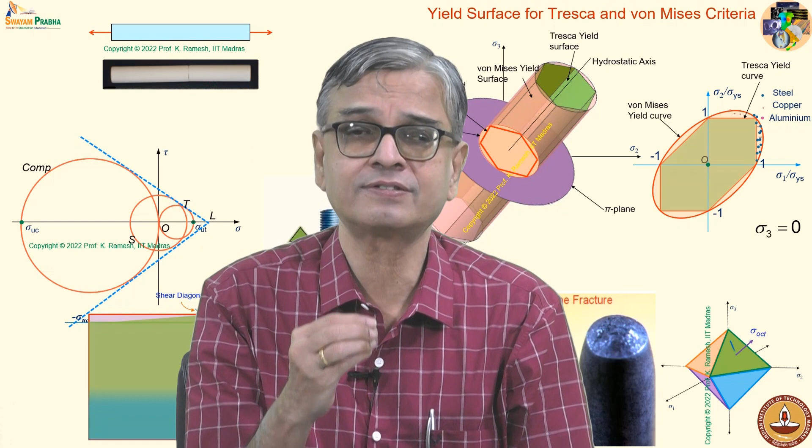We have also seen that when you have a high strain rate loading, material properties change. In extreme conditions, material properties change. For all of this, you should do tests, and any test is expensive. Thank you.